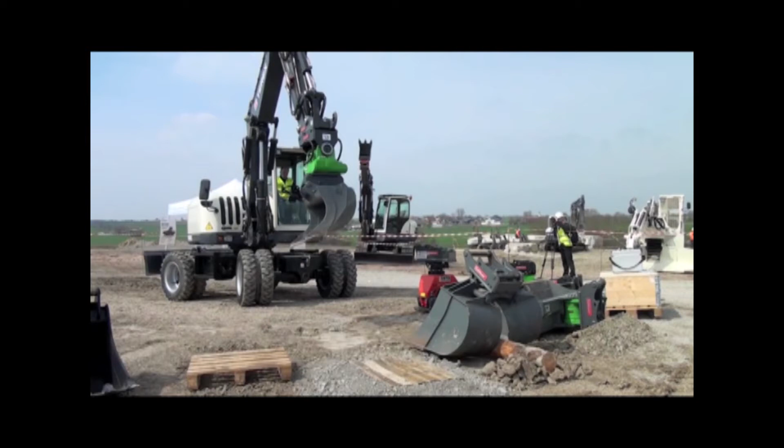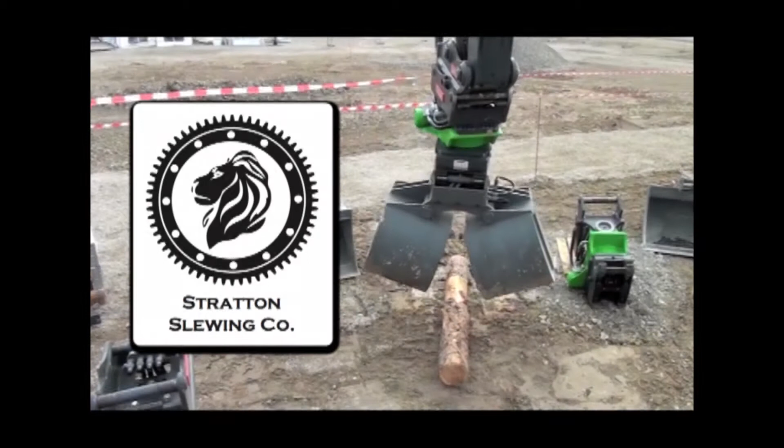The world of excavating can be a jungle. Logs, loose seals, faulty bearings, danger at every turn. That's why we at Stratton Slewing pride ourselves on being the best. Trained professionals to guide you through the excavating wilderness. Stratton Slewing: Stability, integrity, pride.

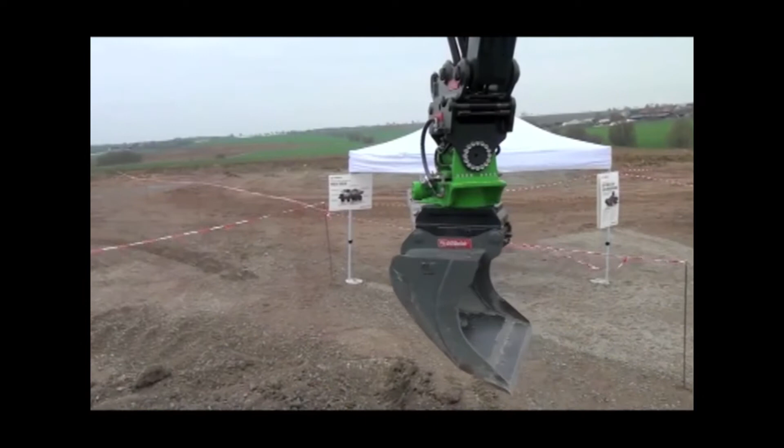Hi, I'm Philip and we're Stratton Slewing Company. We were employed by PTE Hydraulics to design with them a slewing system for their main customers, Atlas Heavy Engineering. A slewing system is a mechanism which will allow an excavator bucket to rotate 360 degrees.

For us to get a start to a working prototype which we can develop, and for you guys hopefully to learn a few aspects of industry and apply some of your knowledge.

The overall aim of the project is to create a design for a 3-ton excavator. The design needs to be capable of full 360 degree rotation, to be compatible with existing PTE produced tilt actuators, and compatible with quick hitch excavator attachments. The scope focuses on the mechanics of the system, including gear sizing, material selection, and manufacturing methods. Exclusions from the scope include the design of a control system for hydraulic movement and design of interfacing parts such as the quick hitch system.

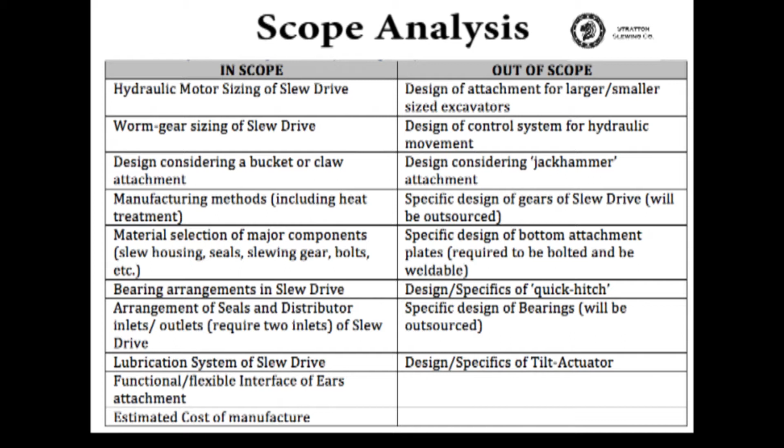My name is Philip and I'm the team leader of the Slewing Drive. The problem was defined and the scope of the project has been set. My role as team leader will be to keep us on scope and ensure the team goals are being kept. We have several objectives we wish to achieve and standards we wish to adhere to, which I need to ensure are being kept.

These goals cover technical, professional, client and team objectives. We have comprehensive client goals for the project. Apart from ensuring satisfaction of both PTE Hydraulics and Atlas Heavy Engineering, we are aiming to manufacture and test a prototype of the design with PTE Hydraulics. This requires us to set and keep deadlines which suit all parties.

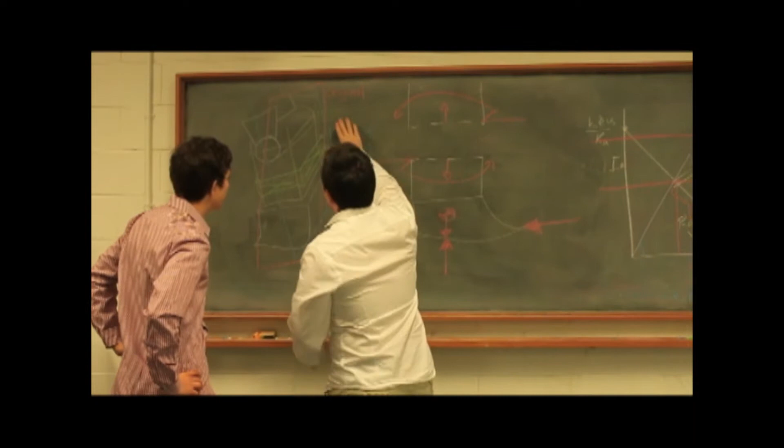Our technical goals are creating a holistic design of high quality and adherence to standards. The feasibility of the project needs to be constantly assessed by the team leader with the guidance of the team to ensure that the deadlines have been set and are achievable. The client needs to be satisfied with our progress.

Furthermore, we wish to uphold a high standard of professionalism throughout the project. For this, we use standards set by our institutions, mainly Engineers Australia.

With a project of this size, it is easy to be sidetracked by unimportant detail or work that is not within our objectives to investigate. As team leader, it is important to ensure that I keep everyone on track to meeting their deadlines, keeping and ensuring manufacturer and customer satisfaction and high quality and relevance of work.

The team roles were designed with use of a Belbin questionnaire to investigate personal team working qualities, which can help identify strengths and weaknesses of each member. Through identifying strengths and weaknesses and setting roles, an effective team dynamic has been established. The roles we have designed are team leader, PTE liaison, chief design engineer, and development coordinator.

Hello, my name is Joe Kneinberg and I hold the role of PTE Liaison Officer at Stratton Slewing Co. My main obligation is to ensure that clear and effective communication is upheld at all times between PTE and the design team, and additionally with the client, Atlas Heavy Engineering. Gavin Kennedy is one of the senior project engineers at PTE and is our point of contact for this project.

The main method of communication that will be employed throughout the project will be via email, and if immediate contact is required, mobile phone. I'm happy with emails. It's recordable, you don't have to write things down, you can refer back to them.

I'll be utilising these mediums to relay any questions that the design team has following group meetings and give Gavin a progress report since our last contact. These tasks of course require me to take notes of any necessary correspondence during group meetings. From our very first meeting in week 1, I've been in contact with Gavin and ensured that our visits to PTE at Acacia Ridge and Atlas Heavy Engineering at Narangba were a convenience for all parties involved. These consultations were very successful and informative of the client's demands.

For example, after a sit down with Stuart McGregor on our visit to Atlas on the 10th of May, we were informed that they require interchangeable interfaces, something that was not included in the design brief. Our multiple visits out to PTE at Acacia Ridge were very informative, giving us a sound impression of the existing manufacturing tools that we will be able to utilise with our design.

Just a couple of the secondary requirements of my role include the assistance of research and development with James, and design challenges with Matt. This ensures that I have sound technical knowledge of our design and am able to relay the progress of our design onto Gavin successfully. I have no complaints in regards to your communications.

Hi, my name is Matt Lee and I'm the Chief Design Engineer here at Slewing Drive. My focus for the design project for PTE Hydraulics is the configuration and component design of the major units. As lead engineer, I'm also particularly involved in the quality control for the design and report.

I will communicate closely with James, the research and developer, to review substantial prior art of existing systems to create and modify solutions for a new design of PTE's requirements. I will also come up with a design for the prototype to be manufactured and tested later on.

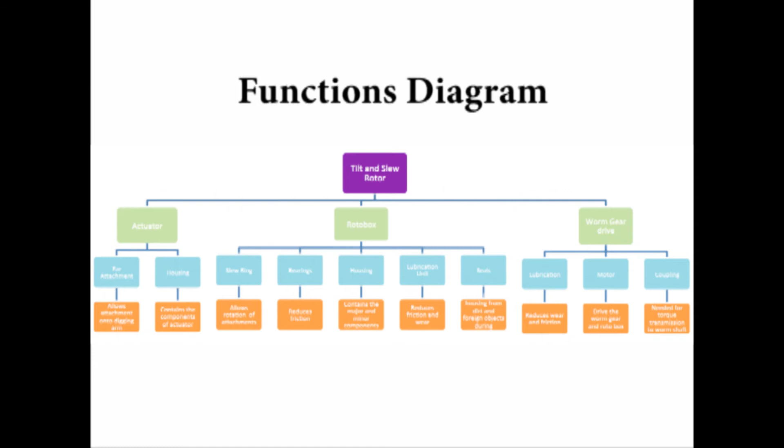Stratton's main technical objectives are based on PTE's goals for the configuration, which are a more compact design and ideally lower weight for their existing interface. They also require a rotor slewing unit to implement with a current tilt rotor unit, and finally require the design to be compatible with existing systems.

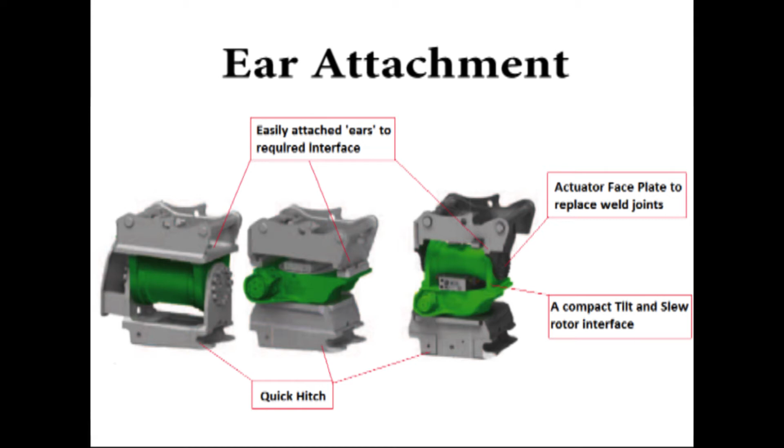The team must also design a new set of interfaces for the ear attachment such that it is suitable for use both on the tilt actuator and rotor slewing unit individually, and also combining their functions.

The major components we will be designing are the slew drive, the worm gear, the seals, slewing ring housing, slew rotor, slewing ring, bearings, and a rotary oil feed through.

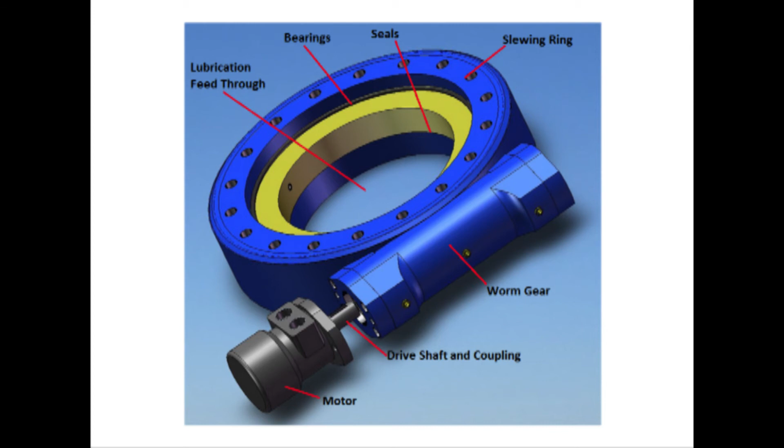Crucial points to consider for the design are wear, geometry, interface of major components, cost of the parts that have to be outsourced, and the significant stress states on all the major components. To meet the safety requirements, the team will also use FMEA and risk assessment standards to forecast possible problems and solutions.

Hi, I'm James Stephenson and I'm the Research and Development Coordinator for Slewing Co. This is a key role for the project as it will ensure our product is up to standard with modern technologies and will be competitive in its field.

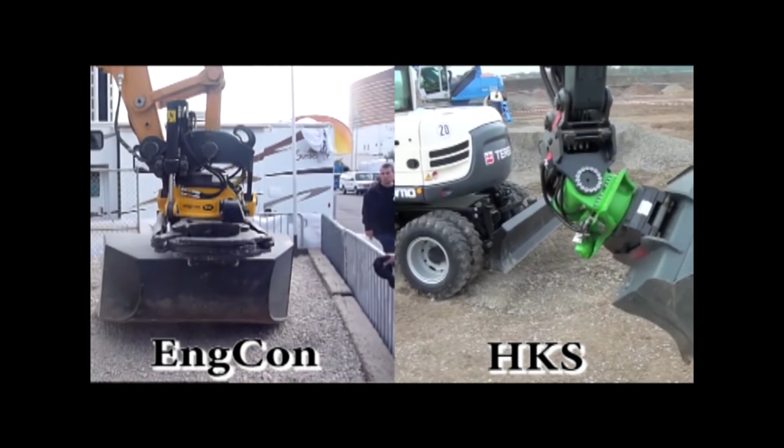Mainly, I will be researching our competitors, such as German company HKS and EngCon, and will be identifying their products' strengths and weaknesses. My role will also be to research the best technology and resources that are viable for our design scope. This will be accomplished through extensive research of our competitors and our components relating to our design, including the worm gear, hydraulic motors, distributors, and any bearings needed for our design.

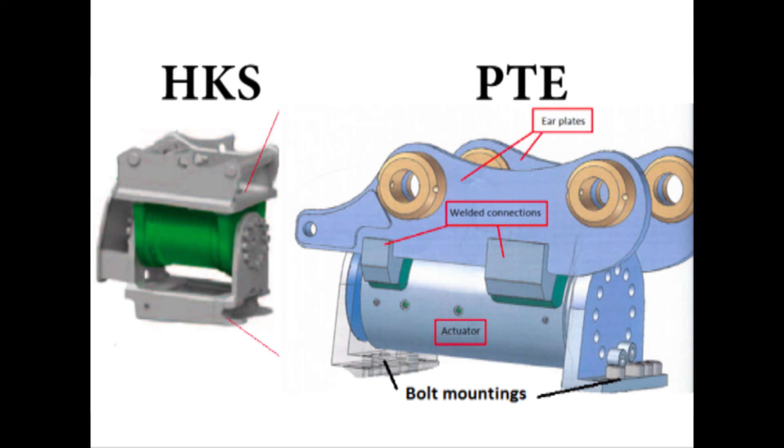A good example of development is looking into our new rotary actuator configuration. This new configuration can be seen here from HKS compared to the original design by PTE. This design aims to be more compact and to reduce the leverage on the excavator arm from any external forces on the bucket or attachment.

We will also be looking to have an edge over our competitors by offering an interchangeable system between a slewing system, rotary actuator, and a quick hitch, as specified by Matt earlier. This offers a more customizable product than our competitors.

Through this role, I'll have a significant part of the technical side of the design as I will be checking that our design results are adequate to compete in the field. And therefore, I'll be working closely with our design engineer, Matthew Lee.

Hopefully you'll get something out of it, and we'll get something out of it.

You've seen what our project is about. You've seen how we intend to complete our objectives. You've seen what each of us will be contributing and our roles in the project. Stratton Slewing is looking forward to an enjoyable experience with our progression into the technical design phase, and having a good time doing it.